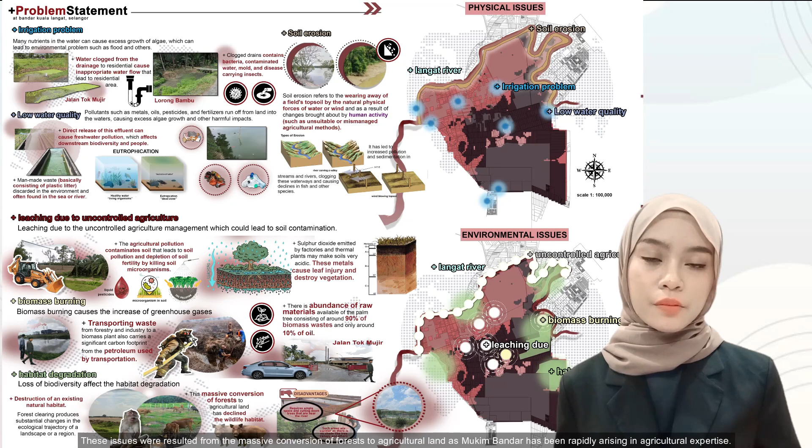Next is environmental issues. There were several in our inventory analysis, but we extracted and summarized them into three major environmental issues: leaching due to uncontrolled agricultural activities, biomass burning, and lastly habitat degradation. These issues resulted in massive conversion of forests to agricultural land, as Mukim Bandar is now rapidly rising in agricultural expertise. So after identifying this problem statement, we decided that we have to find an area that is suitable for agriculture.

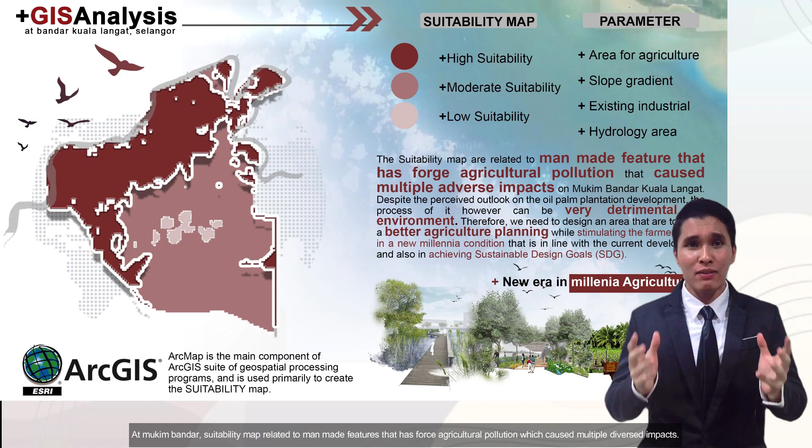Let me explain about the suitability map at Mukim Bandar Kuala Langat, Selangor, and the difference between suitability map and sensitivity map. At Mukim Bandar, the suitability map relates to man-made features that have forced agricultural pollution, causing multiple adverse impacts. So, suitability map can be defined more to man-made aspects and sensitivity map more to natural aspects.

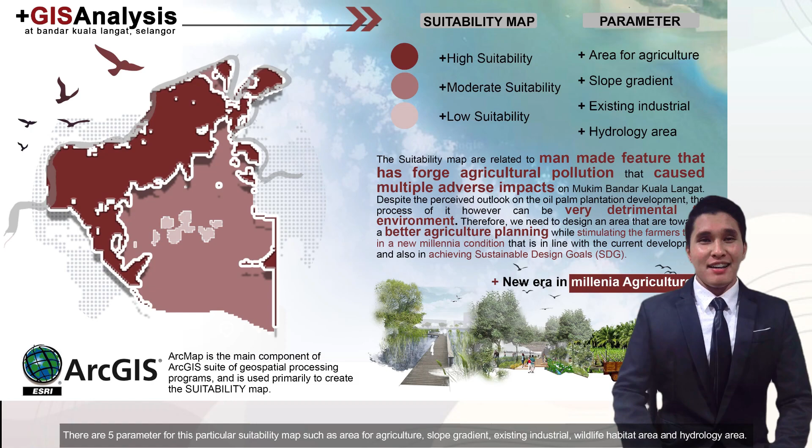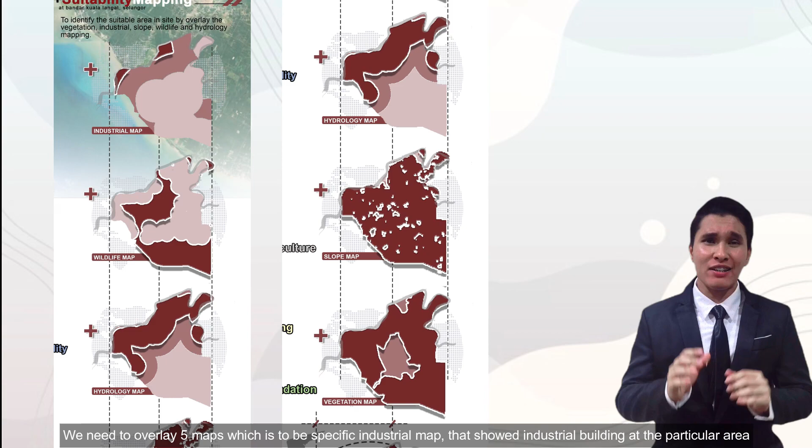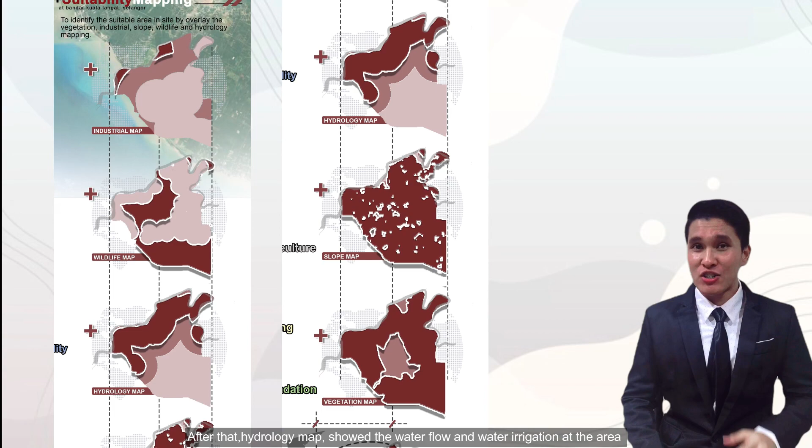There are 5 parameters for this particular suitability map. We need to overlay 5 maps: industrial map that shows industrial buildings in the particular area, wildlife map that indicates wildlife animal population in certain areas, hydrology map showing water flow and water irrigation in the area, slope map that identifies the surface area, and lastly vegetation map.

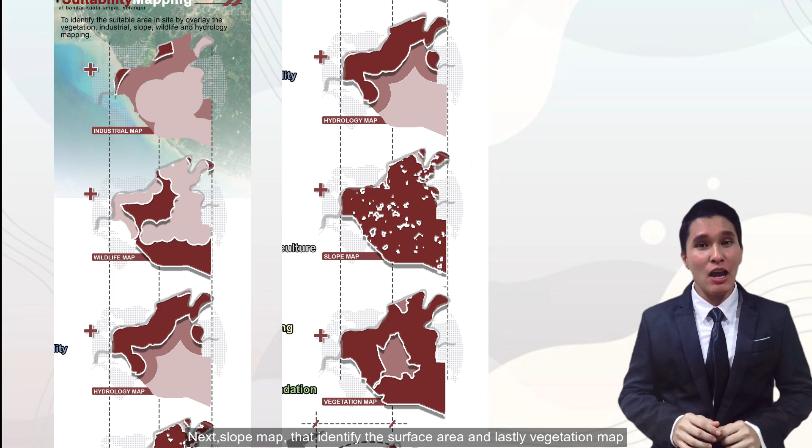After the map overlay process is completed, we are able to see that the majority of suitable area in Mukim Bandar is located at the northern part, which has potential in developing sustainable agriculture for locals and tourists.

Now I would like to share some ideas about design solutions. Because we have 5 factors - vegetation, hydrology, wildlife, soil, and industrial - we also have 5 different solution ideas for every factor. Let's start with the design solution for vegetation.

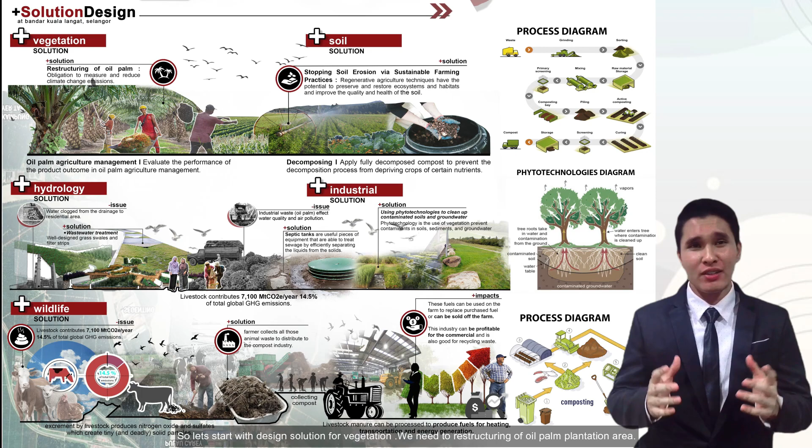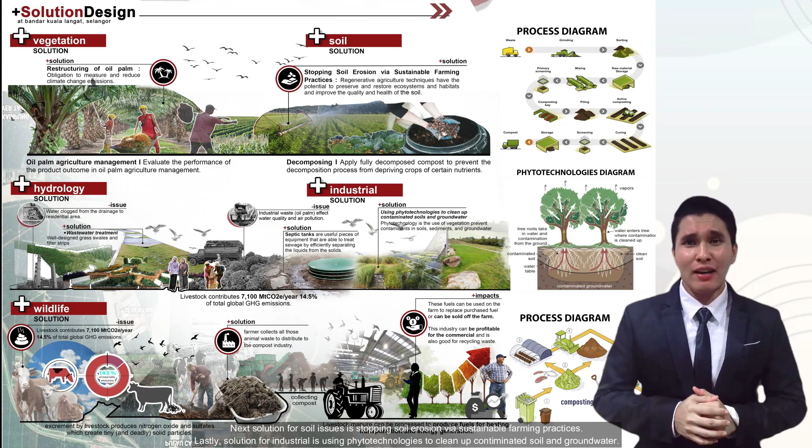We need restructuring of oil palm plantation areas. Then, for hydrology, we solve the issue through wastewater treatment. After that, for the wildlife issue, the solution is to collect all those animal wastes to distribute to the compost industry. Next, the solution for the soil issue is stopping soil erosion via sustainable farming practices. Lastly, the solution for industrial is using phytotechnologies to clean up contaminated soil and groundwater.

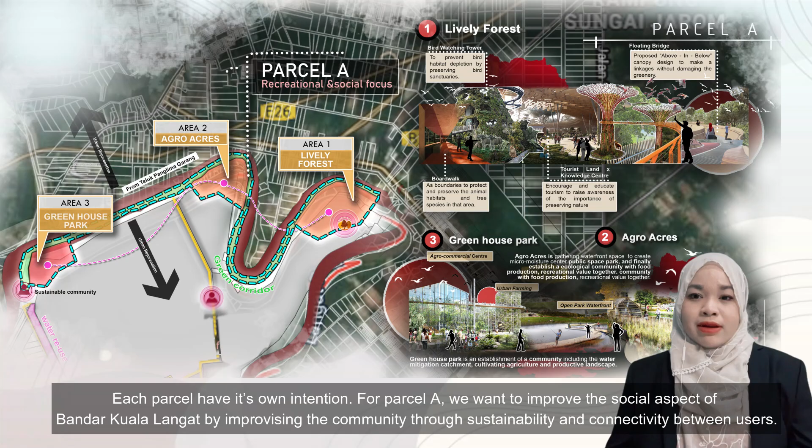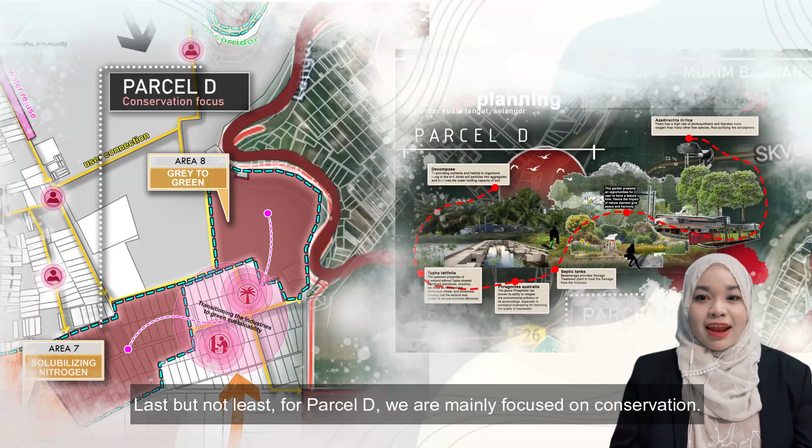For parcel A, we want to improve the social aspect in Mukim Bandar through sustainability and connectivity between users. For parcel B, we focus on ecological enrichment. For parcel C, we mainly focus on agricultural aspects. And for parcel D, we mainly focus on conservation.

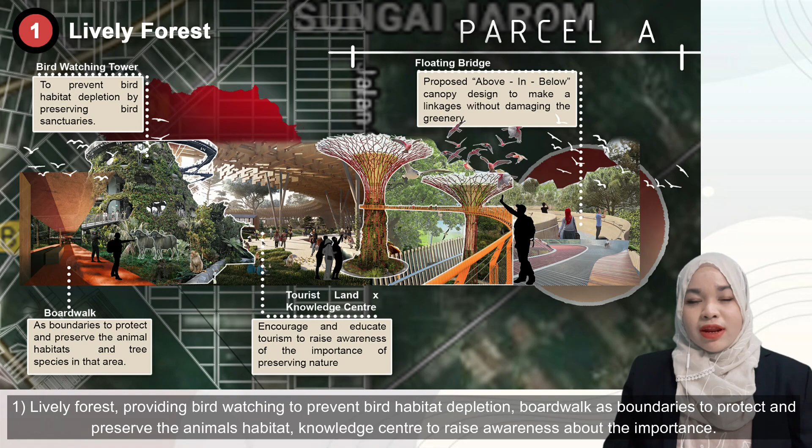Going further into each parcel: parcel A consists of 3 areas. The first is the lively forest, which includes bird watching to avoid bird habitat depletion, a boardwalk as a boundary to protect animals, and a center for tourist awareness about wildlife protection. Moving to the second area, Agro Acres.

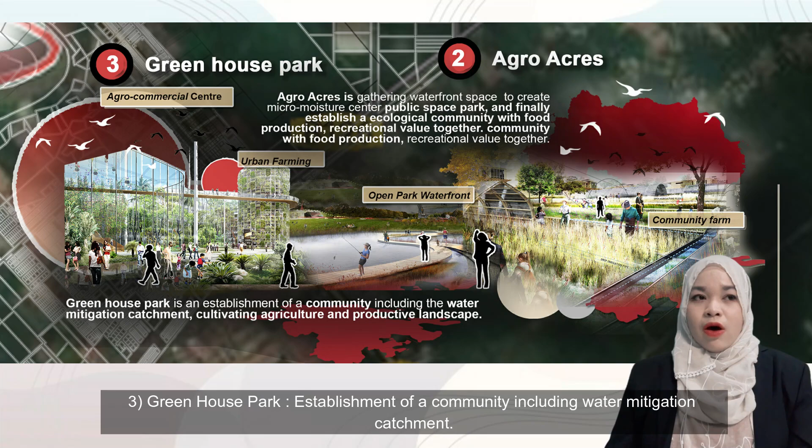Agro Acres provides a waterfront gathering space to create micro moisture for the community while establishing the ecological community. Moving to the third area, greenhouse park, which is an establishment of a community including water mitigation catchment.

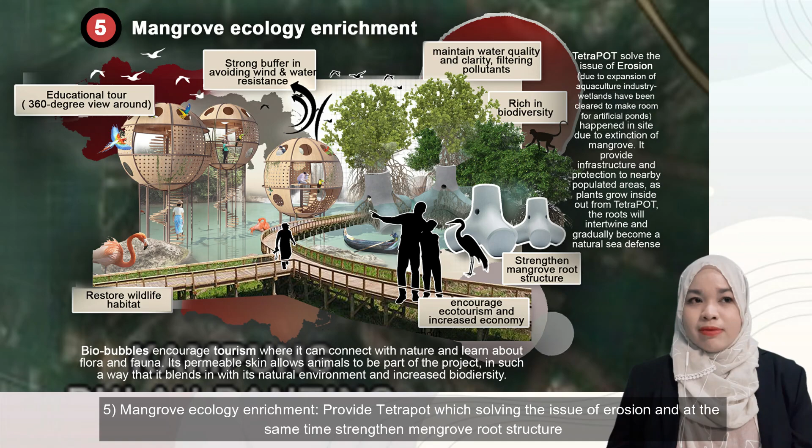Moving to parcel B, which consists of 2 areas. The first is ecotourism aquaculture, where we locate the farm at a suitable area in a systematic arrangement. The next area is mangrove ecology enrichment, where we provide tetrapods able to solve erosion issues while also strengthening the mangrove root.

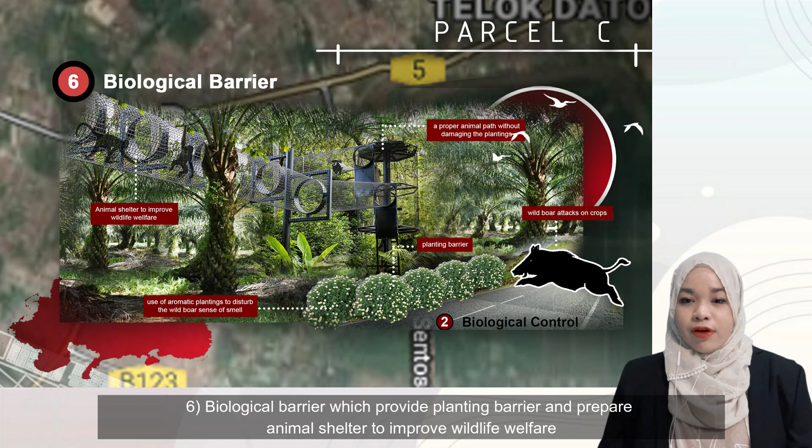Moving to parcel C, which consists of 1 area: the biological barrier, where we provide a planting barrier and animal shelter to improve wildlife welfare. Moving to the last parcel, parcel D.

Parcel D consists of 2 areas: solubilizing nitrogen, and grey to green through decomposition to provide nutrients for biodiversity, and septic tanks to provide sewage treatment.

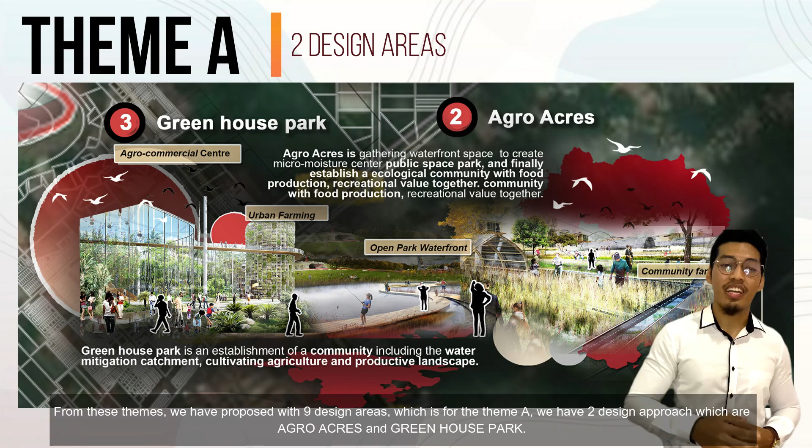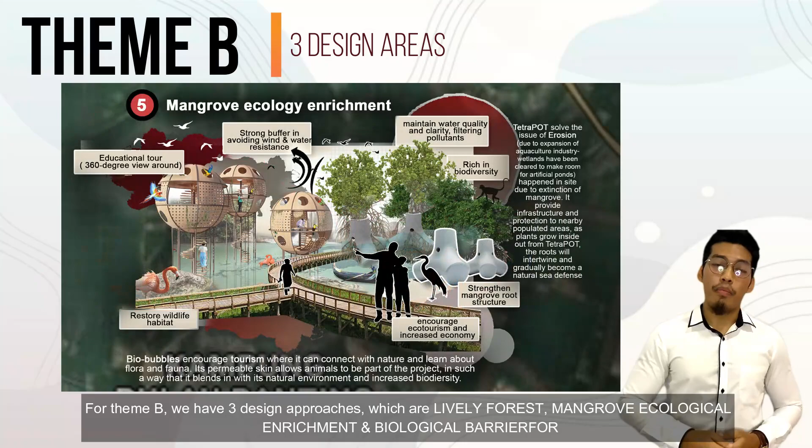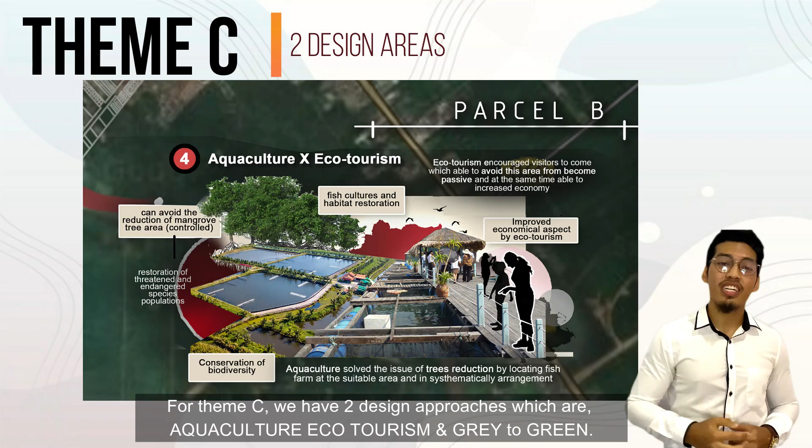From these themes, we approached with 9 design areas. For Theme A, we have 2 design areas: agro acres and greenhouse park. For Theme B, we have 3 design approaches: lively forest, mangrove ecological enrichment, and biological barrier. For Theme C, we have 2 design approaches: aquaculture ecotourism and grey to green. For Theme D, the last theme, we have 2 design approaches: solubilizing nitrogen and wild animal disturbance.

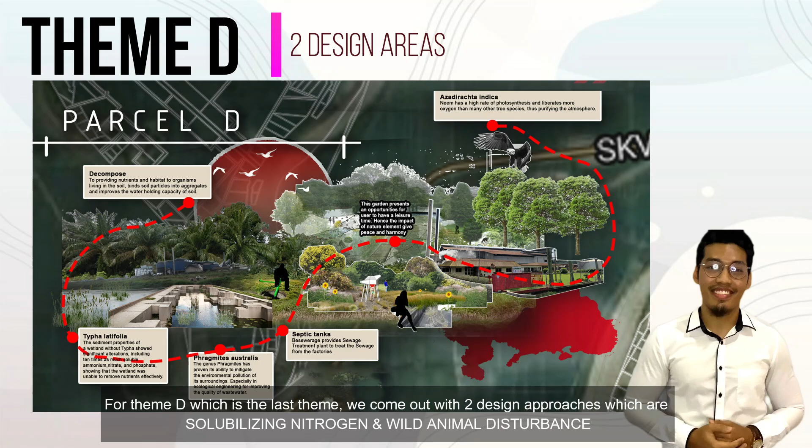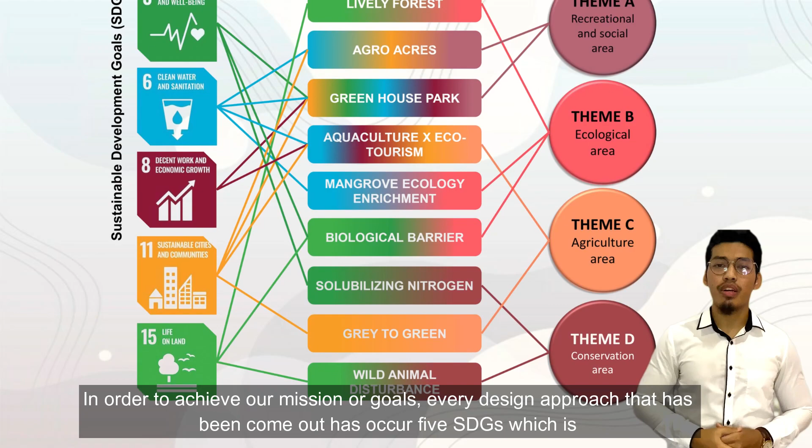In order to achieve our mission and goal, every design approach that came out will address 5 Sustainable Development Goals: good health and well-being, clean water and sanitation, sustainable cities and communities, decent work and economic growth, and life on land.

Our aim in rejuvenating agricultural life through sustainable land management meets well with our objectives, which are good production outcome, sustainable landscape design, and preserving land resources.

As a conclusion, the overall goal of agricultural landscape planning based on the concept of Rich Return is to regain the landscape planning that can enhance and increase the current landscape agriculture area.

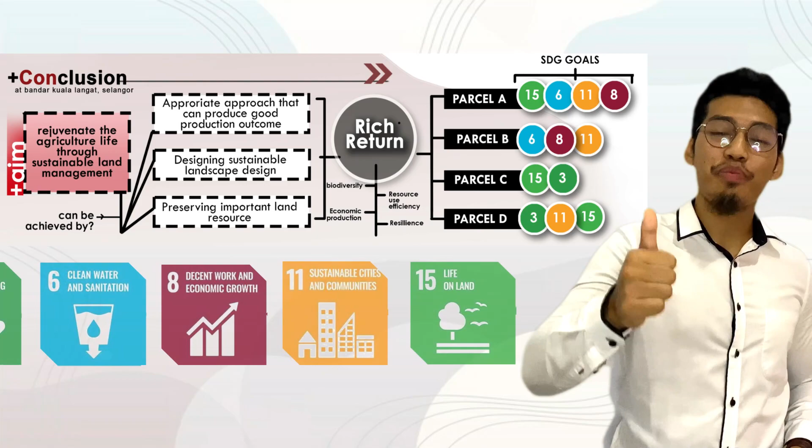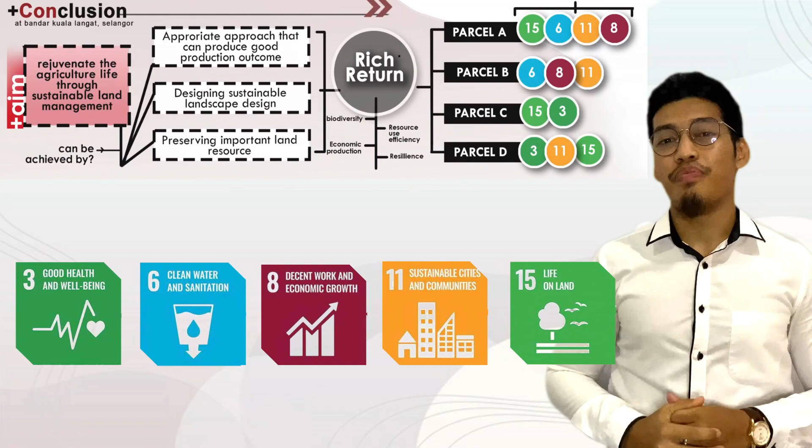And the 5 SDGs we came up with—good health and well-being, clean water and sanitation, decent work and economic growth, sustainable cities and communities, and life on land—are related to the issue on our side.